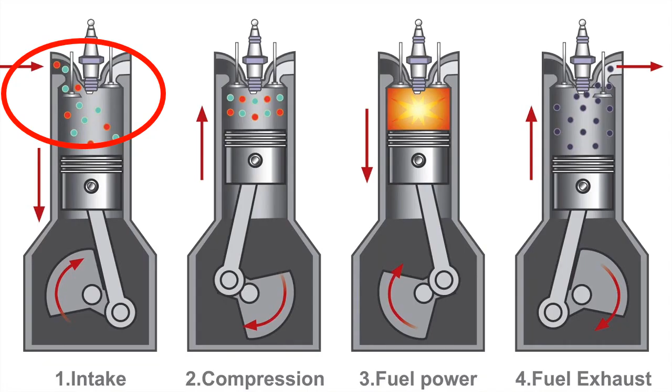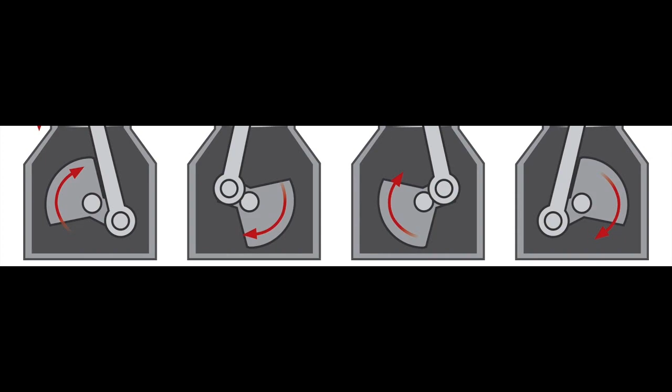Most engines require some sort of air to work. For example, it requires air to burn fuel, and it also requires air to push the pistons which run the engine. Basically, air is let into a cylinder that contains a piston. The piston pushes up from momentum or something. Then some sort of combustion happens to rapidly push the piston back down. The up and down movements of the pistons are then used to spin a wheel or a rod, which then can spin even more wheels.

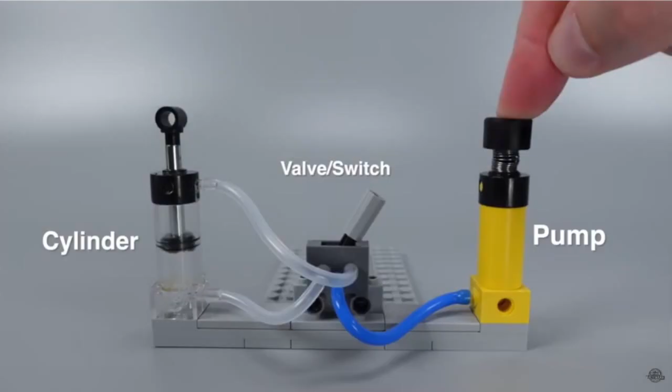Usually, the fuel of an engine is what gives the pistons a push downward, but it is also possible to do this without any fuel. It can be achieved through taking turns letting compressed air in on the top and bottom side of the piston, causing the piston to move only due to air pressure. These types of engines are called compressed air engines. Though air takes up a lot more space than fuel, you can find air literally everywhere, which you cannot for fuel. But sadly, the air around us is not nearly compressed enough.

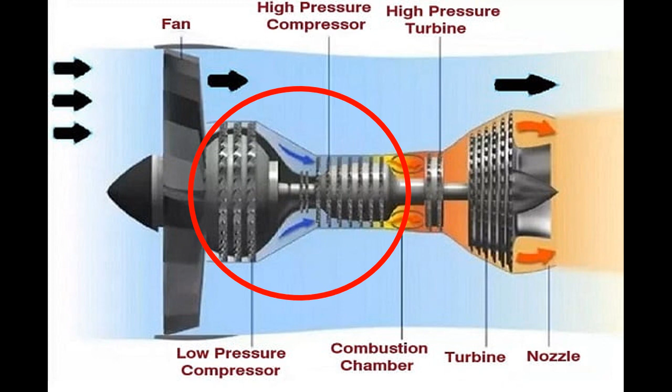So what if we built an engine that could collect this air, and compress it? Well, we already have, and these engines are called jet engines. They do exactly what I just said. They collect huge amounts of air, compress it with progressively smaller fans, then set it on fire with fuel to increase the thrust even more.

So if we remove the setting on fire part, we get a less powerful, but still working air compressor. So after the air passes through the fans, it can be sent into a compressed air engine, which will in turn spin the fans of the jet engine. But there is a problem with this: one engine is required to power the other, and they both cannot be turned on since they do not use electricity or fuel.

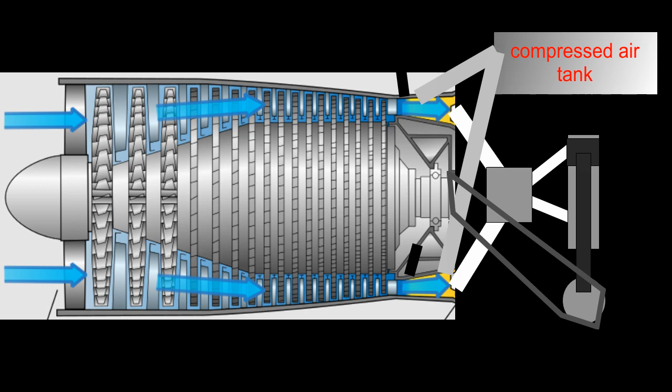A solution to this problem is to put some compressed air into the air engine, then stop once it is fully turned on. This is similar to how lawnmower engines require you to manually pull a string to get it spinning. And yeah, that is how you can create an engine that powers itself.

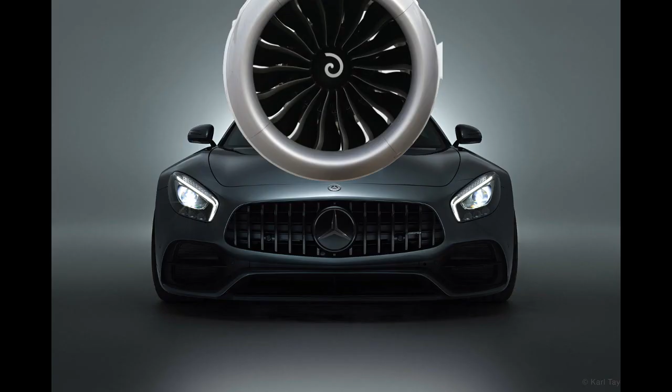Just remember to put it on top of your car, because you won't be getting much air inside of it. Also, the jet engine thingy would have to be pretty big in order to produce enough power.

Anyways, hopefully you enjoyed this tutorial, and hopefully it is at least 1% correct. Bye.